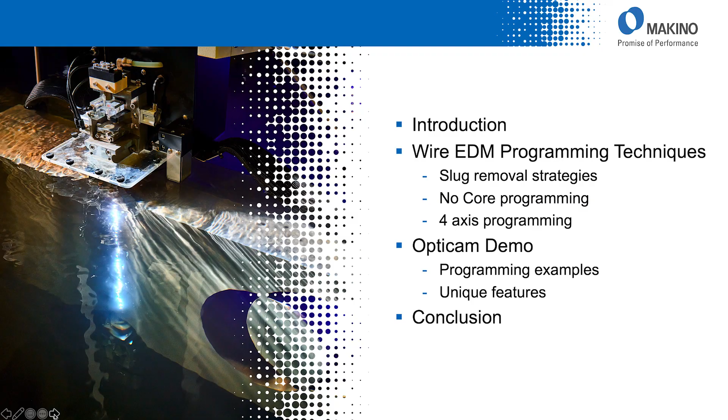Today we're in the Makino Experience Center, and we're going to be discussing wire EDM programming techniques. So first I'd like to give you a little overview of what we're going to be talking about. We're going to talk about some slug removal strategies. These are ways that you can optimize your programming. We're going to talk about no-core programming, which is pocketing, and then four-axis programming.

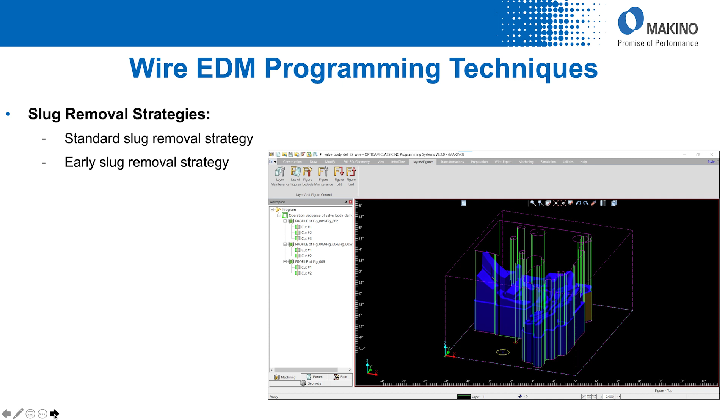Once we talk about these in the presentation, we're going to go to Alan Weeks from Opti Solutions, and he's going to give us a demonstration of the OptiCam software. So let's get started. So first, slug removal strategies. Standard slug removal strategy, we're going to discuss that, explain what that means. Then we're going to go through early slug removal and a slug removal after all of the rough cuts. So what do those mean?

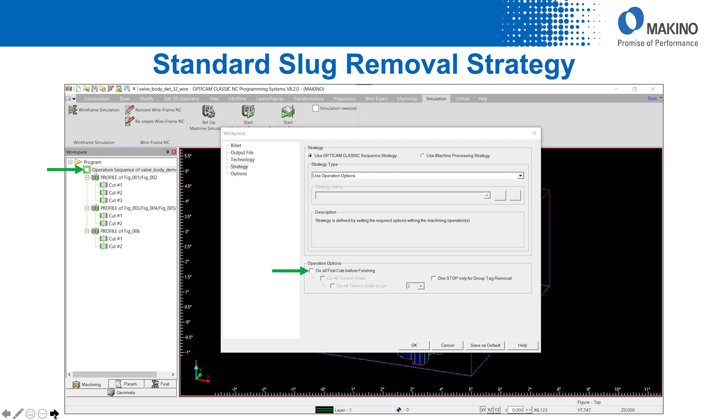So a standard slug removal strategy. In OptiCam, how am I going to make this work? Well, the first thing I'm going to do, I'm going to come in here and I'm going to select my workpiece, and it'll bring up this window, and I'm going to not check do all first cuts before finishing. This is a strategy page of the workpiece itself.

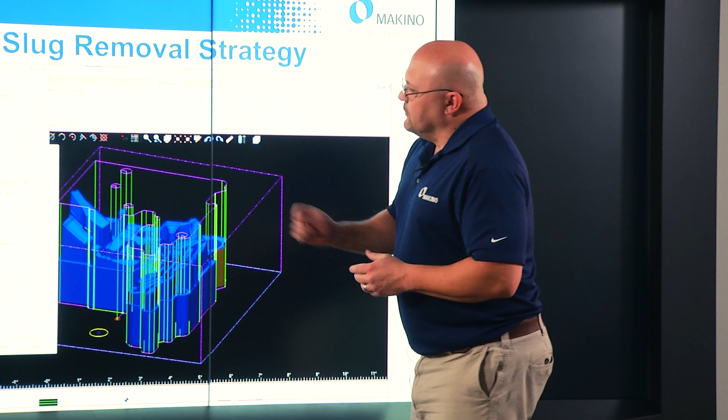Next, I'm going to go to the profile. So this profile here is for the holes that are inside of this particular part that we're looking at. And when I hit the profile, I go to the setup page and the tagging page, and you can see here, tag removal method. I have many options of what I can do. For this particular demonstration, or this strategy, we're going to use stop, then wire cut tags on the first cut.

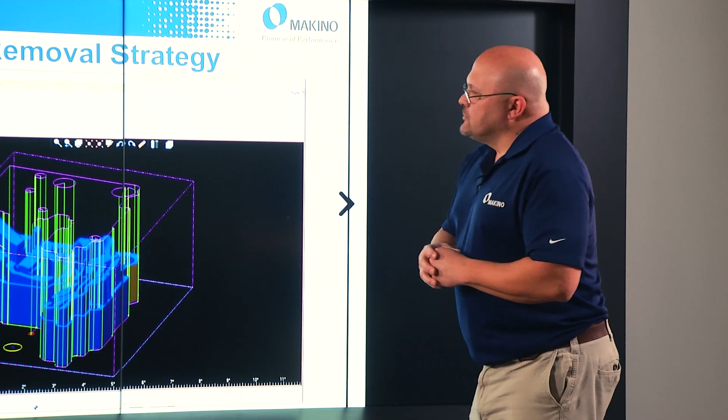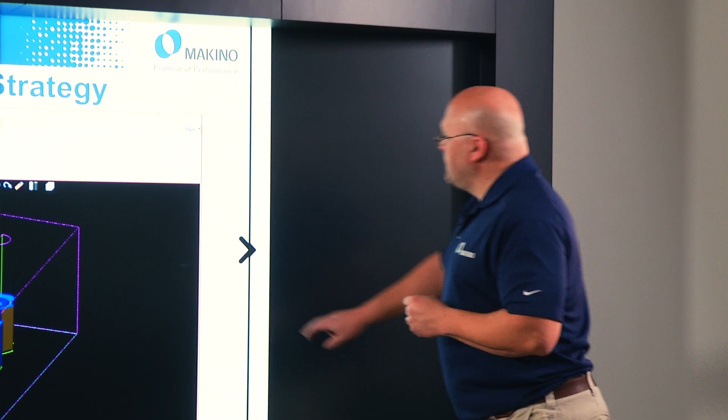Since this is a part where I have features internal and external, I need to set up a strategy for the outside of the insert. So I'm going to click on that particular profile, go to the setup page, tagging page, and I'm going to wire cut the tags at the end of the operation. So I got a little video here to show you, by setting up our program that way, how it's going to function.

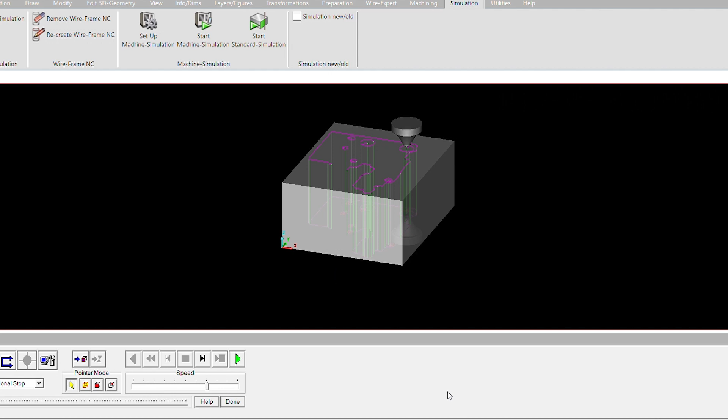So now that we've programmed it that way, it's going to show us or simulate what it's going to do. So we're going to rough the holes, it's going to come to the stop, then we will drop the slug. So every hole internal, these are core pin holes and ejector pin holes, it's going to follow the same pattern. We're going to rough it, drop the slug, and then finish cut it. So that means every time I'm dropping a slug, the operator needs to be there to remove the slug.

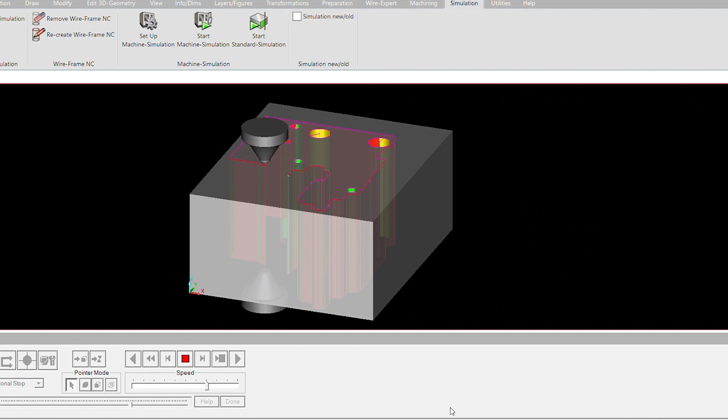So this will go through all the holes internally, because that's what we told it to do. Now once it's done with the holes, it will go to the insert itself on the outside, and it's going to go all the way around roughing it, because we told it to wire cut the tag at the end of the operation, and then it's going to go around and skim cut it with the tag still connected.

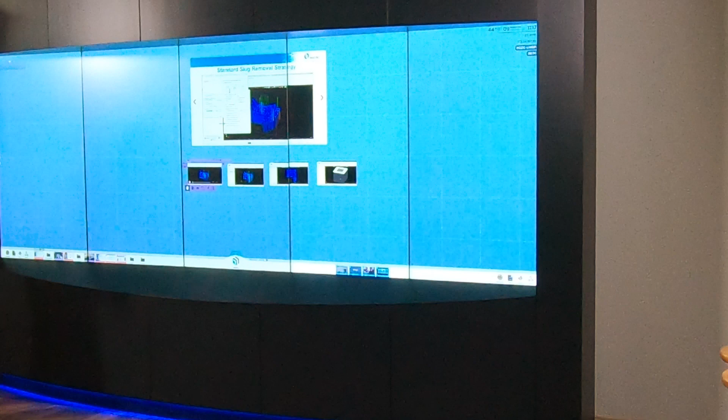And then it'll come to the stop there, and then we cut it off, remove our part, and the part is finished. So that's what I would call a standard strategy for slug removal.

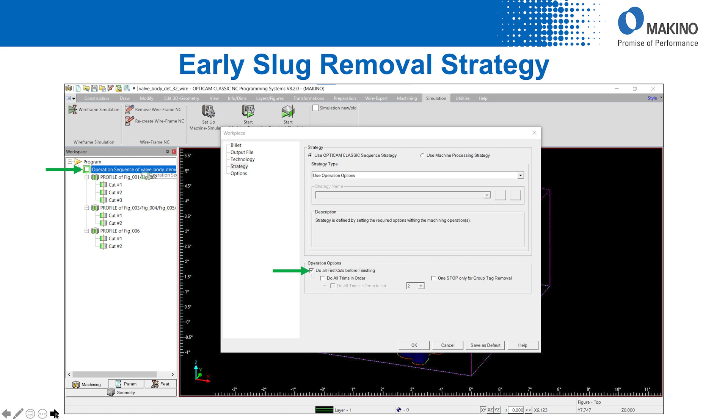So next we're going to talk about the early slug removal strategy. So again, we're going to go to our workpiece, go to the strategy page. Now, unlike the first time, where do all first cuts before finishing was unchecked, we're going to check that. We go to our workpiece profile. These are for the holes. Same thing. This is the same thing we did before. Stop and wire cut tags on first cut.

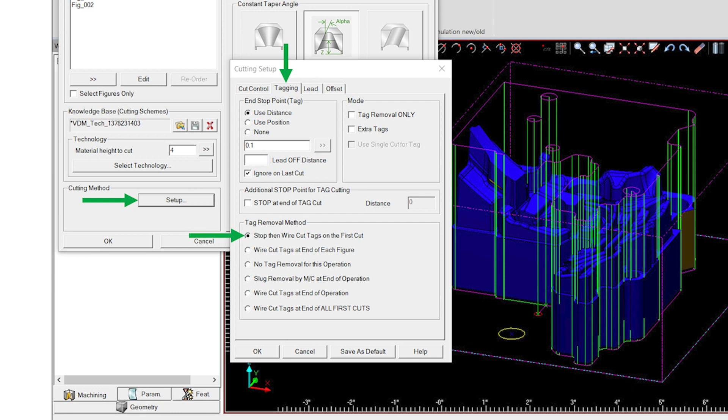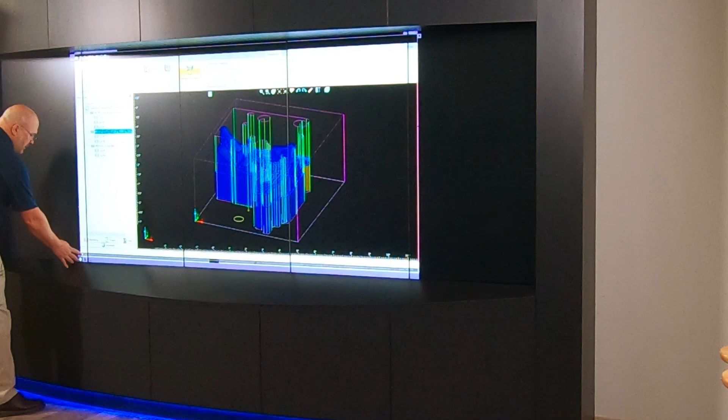The insert itself, we go to that profile, go to the setup page, tagging page, again, same thing. Wire cut tags at end of operation. So the only thing that we've changed is on our workpiece, telling it to do all first cuts. So just by checking one box, now this video is going to show how that will function.

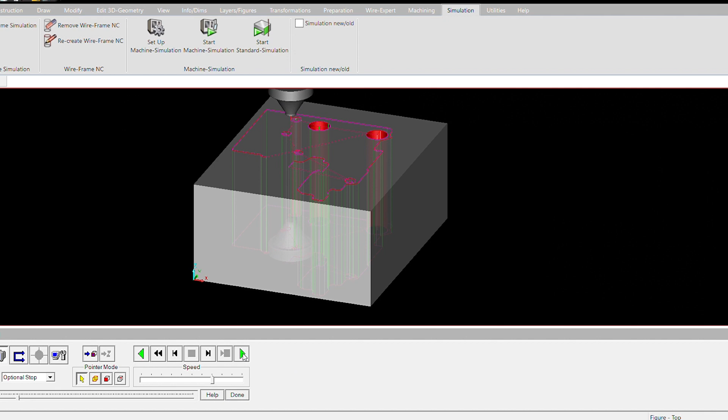Come in here, simulation starts up, and now we did the same thing that we did before, right? It went to the stop and we removed the slug. But now instead of finish cutting, we're going to rough all of the holes first. So we're going to go around, rough all these holes and drop all of the slugs.

Now you might say, well, why would I do that? Well, because the idea is to minimize the operator intervention time at the machine. So by doing this, the only time I need to be at the machine is when I'm dropping those slugs for those holes. So once I've dropped all the slugs, now it's roughing the outside of the part. All of this is unmanned machine time.

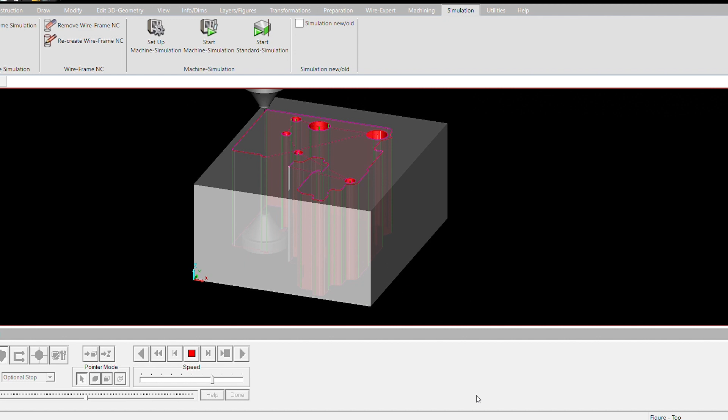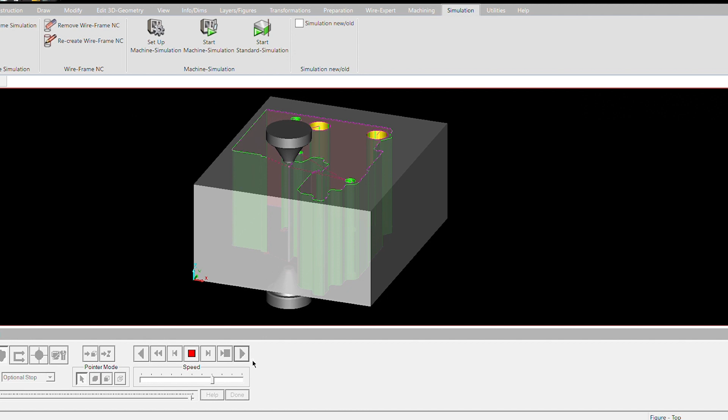Rough the outside, now it goes back to the holes. It's going to finish it. All of this is going to be automatic without the operator being there. And then it's going to go and finish the outside of the block. And then we're going to drop the part off. It's going to be the stop, operator comes back, and we cut the slug, and the part's finished.

So what we've done simply by checking one box was maximize our unmanned machine time, which is how you make money with Wire EDM. So the last slug removal technique I want to talk about is slug removal after roughing. So same thing we did on the last one. We're going to go to our workpiece, and it's going to say do all first cuts before finishing.

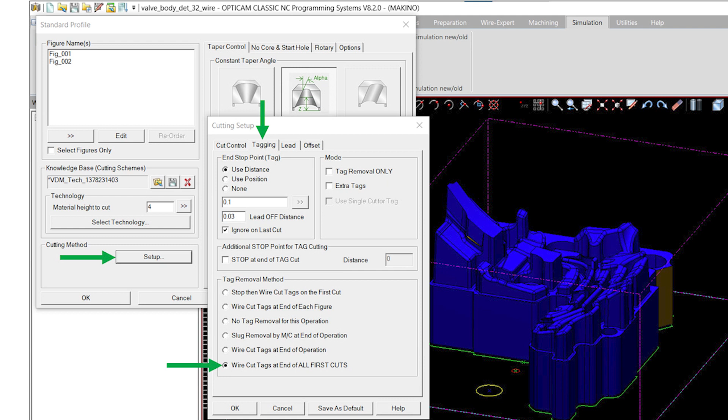Next we go to our profile. These are our holes. Set up tagging. Now this time, instead of clicking on stop then wire cut tags on the first cut, we're going to go down here to the bottom and say wire cut tags at end of all first cuts. Profile for the outside of the part is going to be the same. We're going to have to go to setup and then wire cut tags at end of operation. So again, we just changed one more thing.

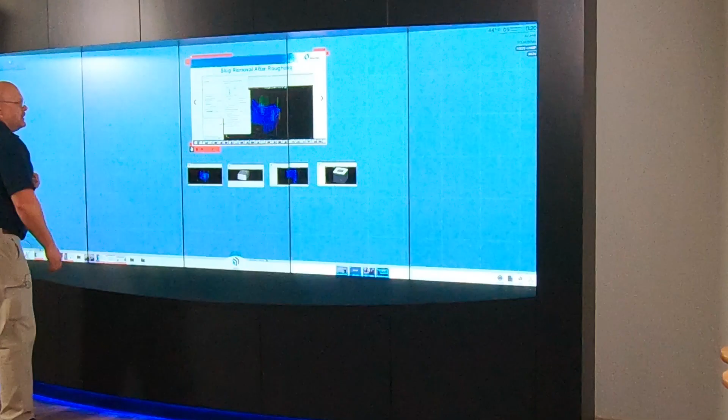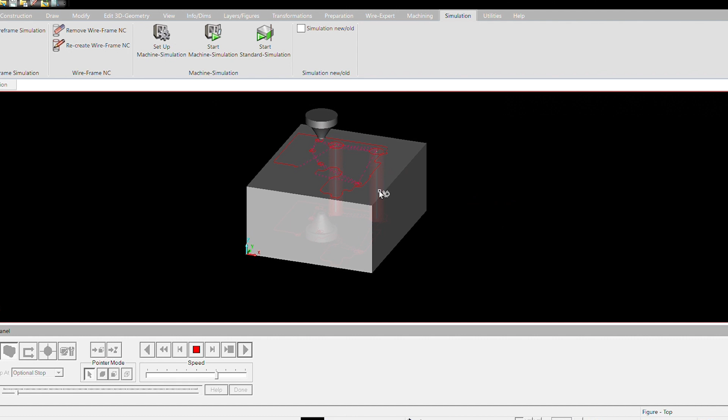And now this video will show you the simulation of that. So on the last one, you remember we went and we dropped all the slugs and then it roughed and skimmed everything. Right here, now what it's doing is it's roughing everything without dropping the slug. So that means that the slug is still intact on the inside where the holes are. So it roughed all the holes, now it's roughing the outside of the block.

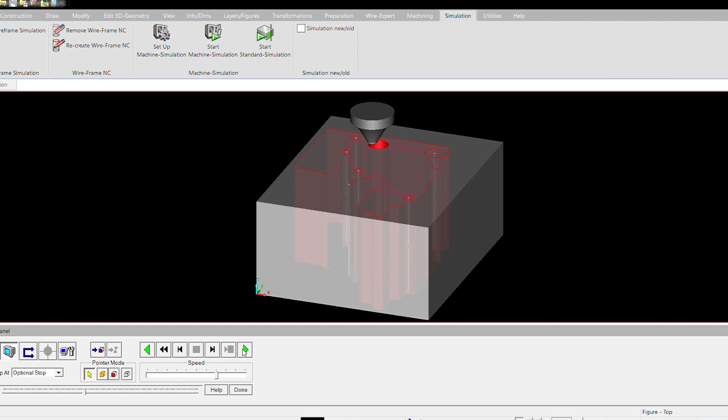Now you might say, why would I want to do that versus the way I did it before? Well, let's say I'm setting up the part right before I'm getting ready to go home for the night, and I want to get as much machining done while I'm not there as possible. By doing it this way, I get all the roughing done. Come back in the morning, I drop all the slugs. So I don't have to stay there to drop the slugs, right? I can leave immediately. So now when I come back in the morning, I hit start, drops all the slugs.

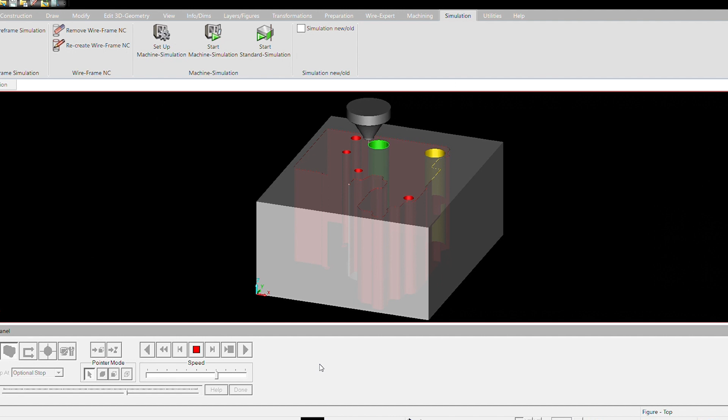And now once I drop all the slugs, again, I'm done. I can walk away, I can go do something else. It's going to skim cut all of the holes and skim cut the outside of the block as well. And then once it's done with the skim cut, again, we're going to cut that tag. There it is, part's done.

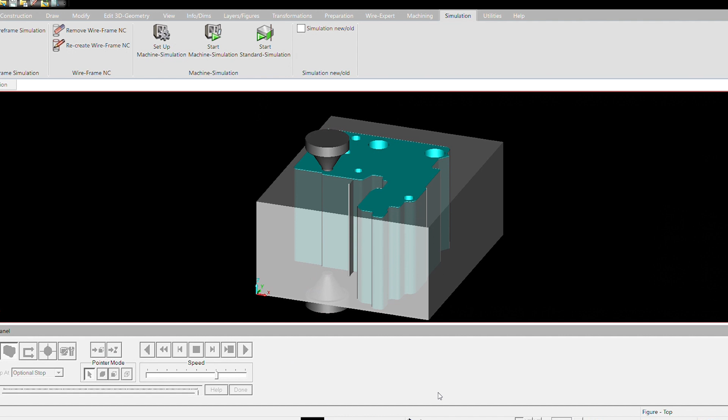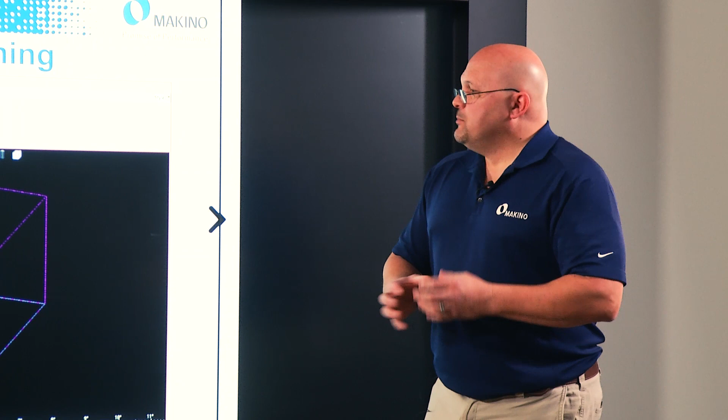So, very easy to change our process, right? That's one nice thing about this software. We can click one button, hit post again, and totally change the way that we're going to process this job. So that's just a few of the options that we have. There's many other ways that you can do it, many other tag removal concepts, but those are kind of the three major ones that I wanted to touch on today.

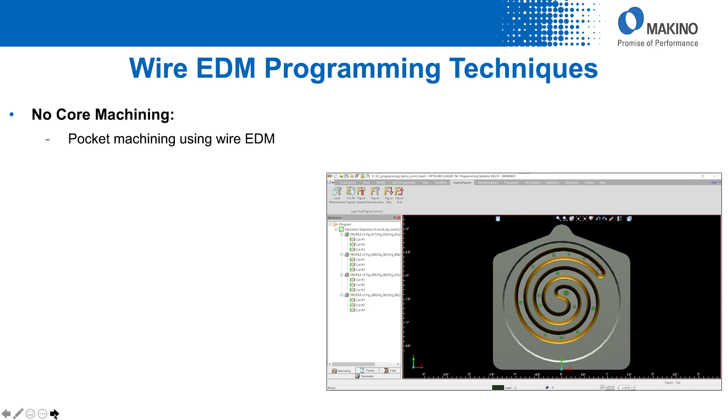So next, I'm going to talk about no-core machining. So no-core machining, what does that mean? Well, essentially it's pocket machining using the Wire EDM. If you're familiar with doing pocket machining on a mill, same concept, but we're using the Wire EDM instead of an end mill. And what does this do for us? Well, it eliminates the need for slug management. So why would I want to do that? So if you think back to what I just showed you, we're dropping those slugs. We have to think about how we're going to process a job, when we want to drop the slugs, when we want the operator to be there.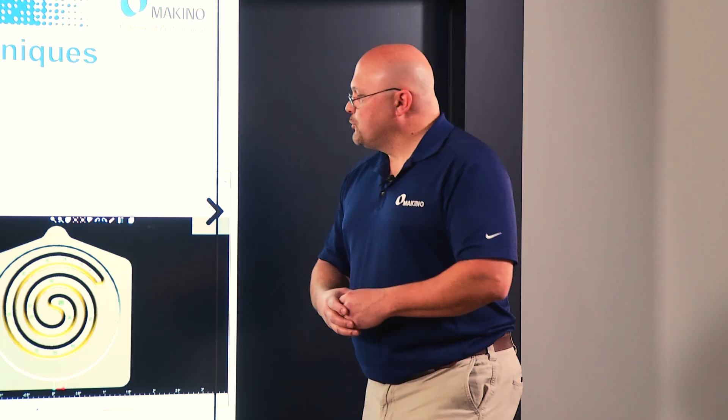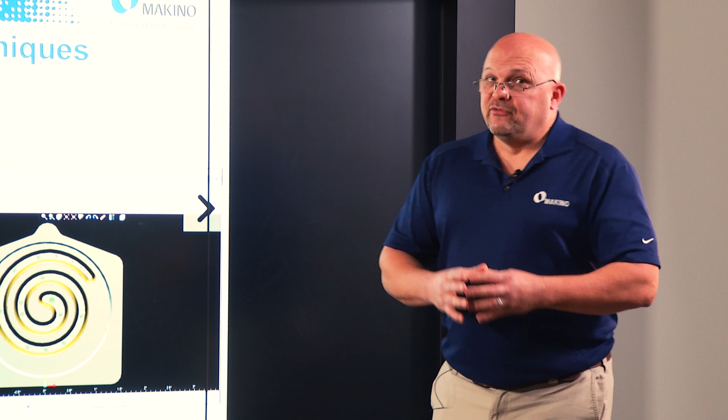That eliminates that. This is primarily used for small features because Wire EDM is a slow process. You don't want to have a really big opening and no core it because it's going to take forever. But for small features, it's very, very effective,

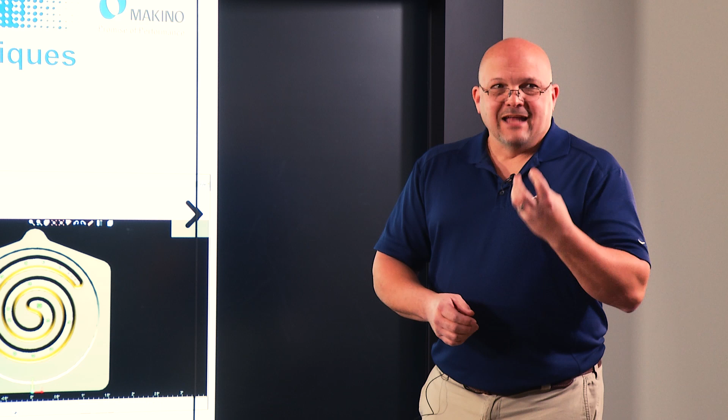because if I have a small feature and I'm going to cut it like we did the first examples, I'm going to get a little sliver. And it's not going to be a big slug, and that can cause all kinds of problems in the machine. So using a no-core technique is very good in those particular instances. To keep in mind when you do no-core, the roughing NC code is created without an offset. Okay, so what does that mean? Well, I'm going to show you.

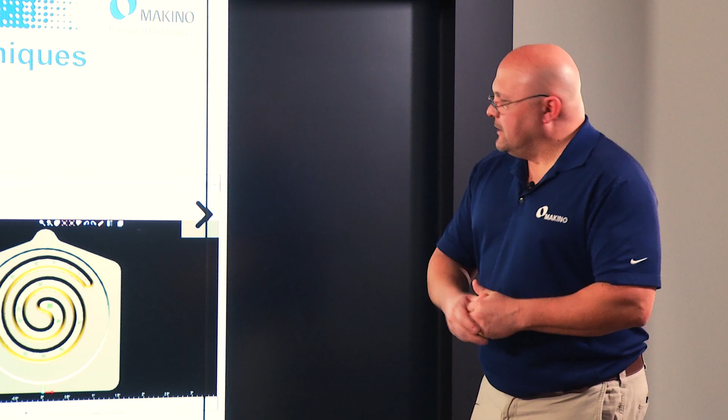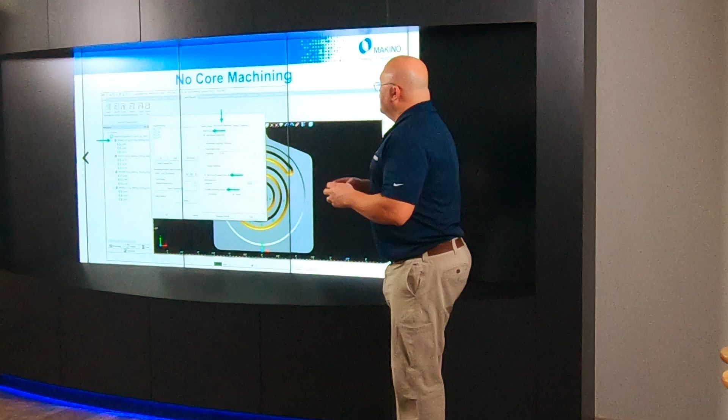So to do a no-core, we're going to go to the workpiece, and once we open the workpiece, there is a tab that says no core and start hole. So we go to start hole, and we can tell it what kind of start hole we have. Is it a round hole? Is it an irregular shaped hole? You could even create another figure inside of whatever shape you're cutting, and it could be an irregular shape. 9 times out of 10, it's going to be a round start hole. And then you would put in your diameter of how big it is.

And then you simply check the box, no core, pocket first, and then you want to give it a step over distance. So that means how much of a step over am I going to have when I'm doing the no core. For Makinos and the technology we have, 8 thou, if I'm using 10 thou wire, seems to work the best, so that's why I use the 8 thou.

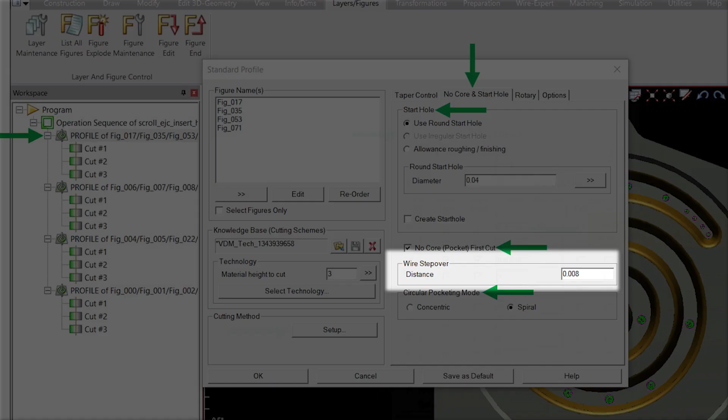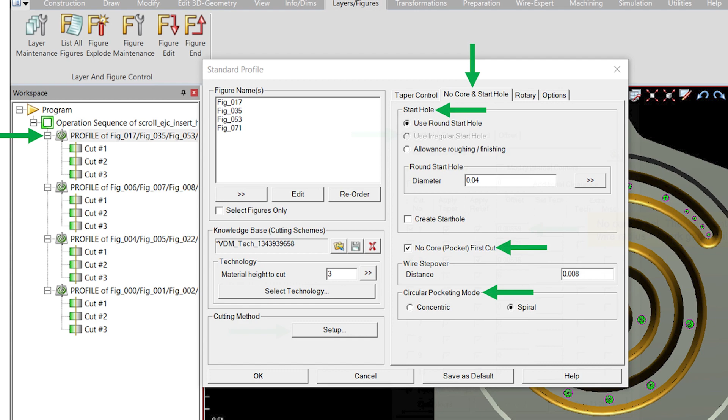And then I also have options on the pocketing mode itself. So I can either do a concentric, where it's just stepping over that 8 thou amount and cutting a circle, right? Step over, cut a circle, step over and cut a circle. For this particular job, I use spiral. So once I do that, then I go to my cut control page. I go to setup page, cut control.

And right here in the roughing offset, this is where we load our cutting offsets and cutting power settings, which you'll get a demo of from Alan a little bit later. But for no core, you'll get this message if you hover your mouse over that first offset. It's going to say no core is set. Value entered in this edit should be the wire radius, spark gap, and finishing allowance per side.

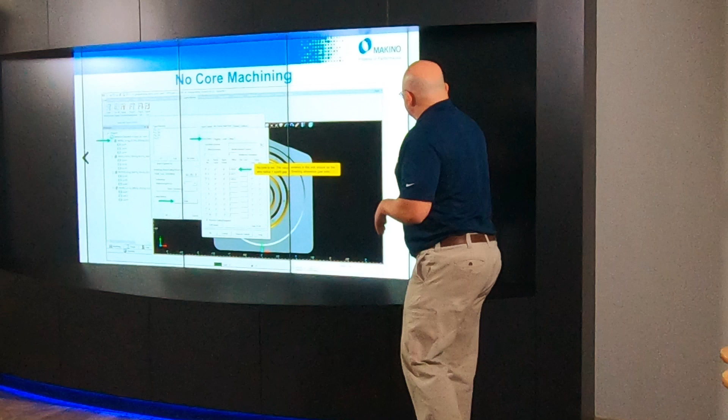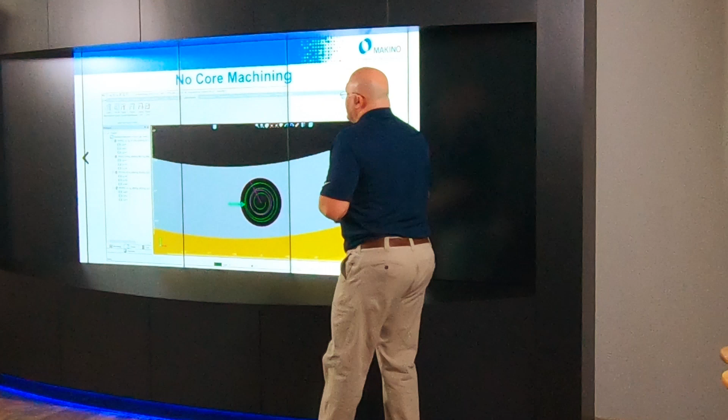The reason for that is that it's not going to apply an offset. So when you do your no core, the geometry is created for the rough cut, and the wire is going to move on the center of that geometry. And this slide kind of shows you that. So once I've done the program, it'll generate this code right here. You can see the green shape, and that wire will run right on the center line of that shape, and that's why you have to compensate for that.

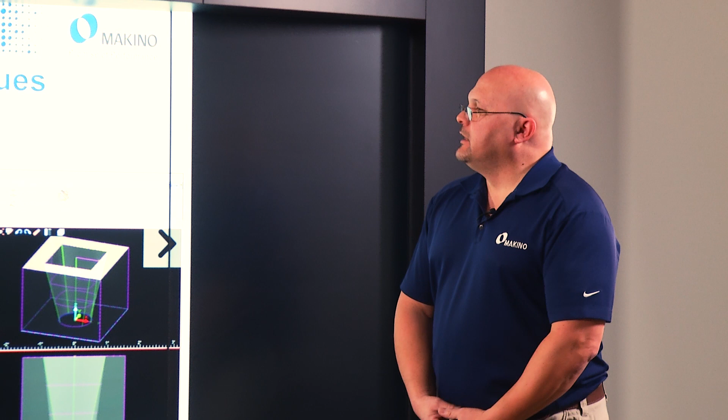So the last technique I want to talk about right now is 4-axis programming. We get a lot of questions about 4-axis programming, how it works, how you should do it. Well, it's a type of taper machining. You know, you can just apply a taper if you want a T value, and it'll cut that angle. But this is a way to do it with 4-axis. And this is a really common way to do tapering, because so many people use solid models today. You can just extract these angles from the solid model.

So when you do 4-axis, you have to create both an upper and lower profile. So everything we've done previously is just a 2D profile. In this instance, we're going to create both an upper and lower shape. With the Wire EDM, you need to think about what it is. So it is a true 4-axis machine.

And what does that mean? That means that I have an XY on the bottom and I have a UV on the top. And they're totally independent of one another. So the way to look at it is I've got two 2-axis machines built on top of one another. Because of that, I can program completely different shapes on the bottom and the top.

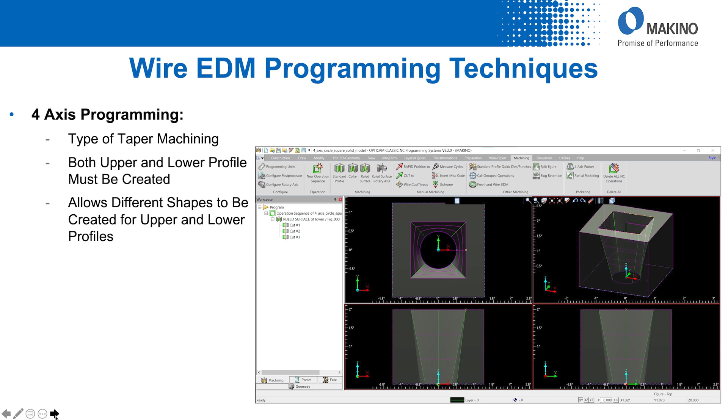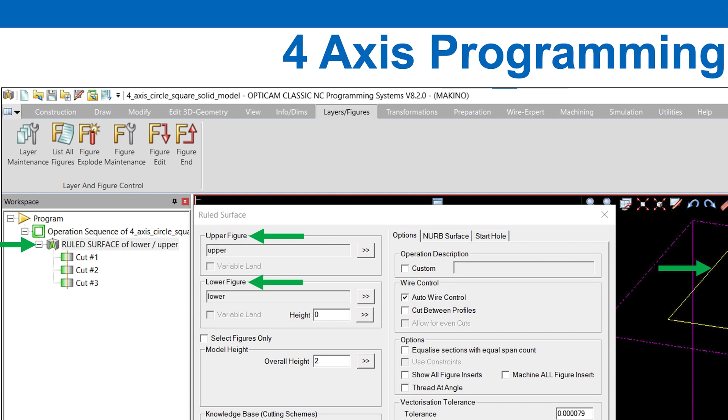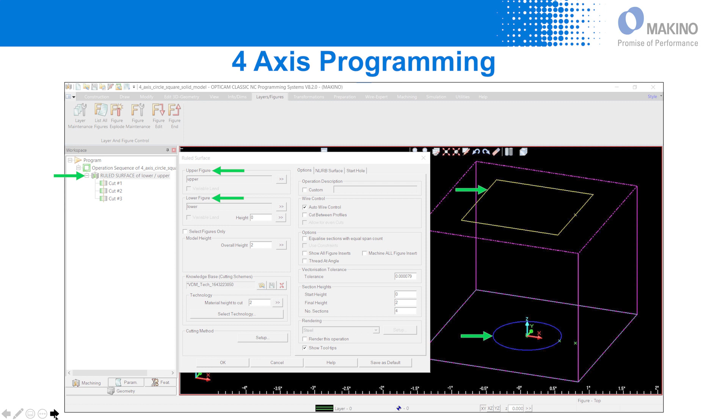So this is a very simple shape here, little circle square. So I'd come into program, I hit ruled surface instead of standard profile. And then when I click on the workspace, I have to create an upper and a lower figure. So obviously I'd create my geometry prior to this, and then I select it. So if you look here on the graphics, the blue is my bottom geometry or lower geometry, and the yellow is my upper geometry.

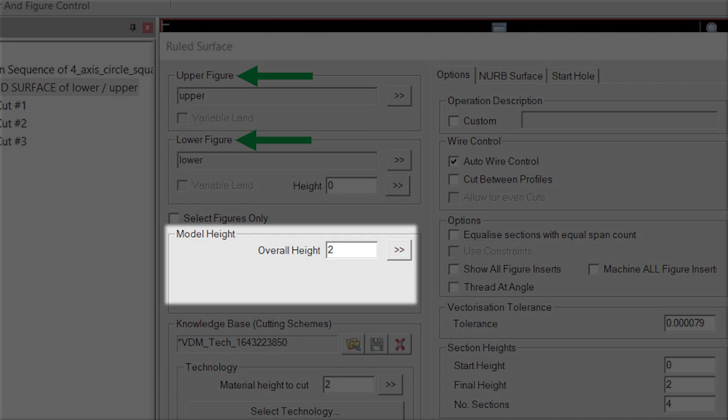I have a couple things that I have to tell it. Where is the lower geometry? So you can see in that window there, it says, what is the height? In this case, it's right at 0, which would be table level. The overall height is the distance between the two shapes. For this example, it's 2 inches.

Now, I could move that part off of the table. If I'm on a fixture or something, if it's up 1 inch, well then my lower height would be 1 inch. It would not be 0, right? Because the table is always 0. And this software will compensate for that when it does its post-process.

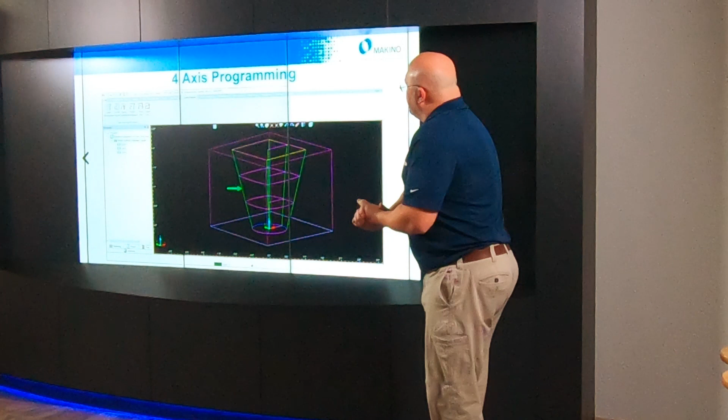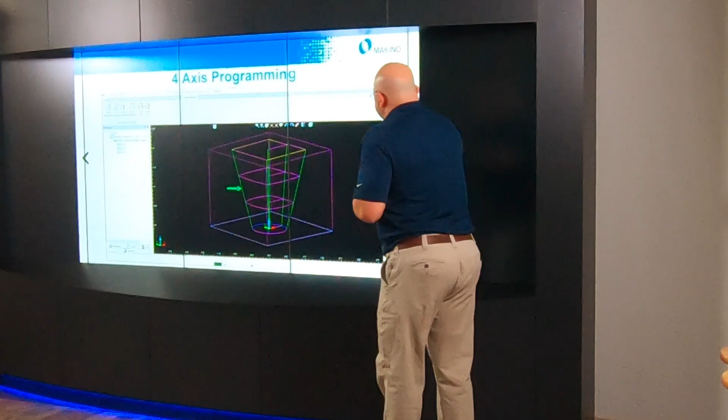Once I do the program, this is the wireframe of the actual program that it creates. So you can see it's going to apply my angle, and you can see how the shape changes from a circle to a square gradually as you move up that angle, okay? So I do have an example of this one for a simulation. So let's take a look at that, just to give you an idea of what that looks like.

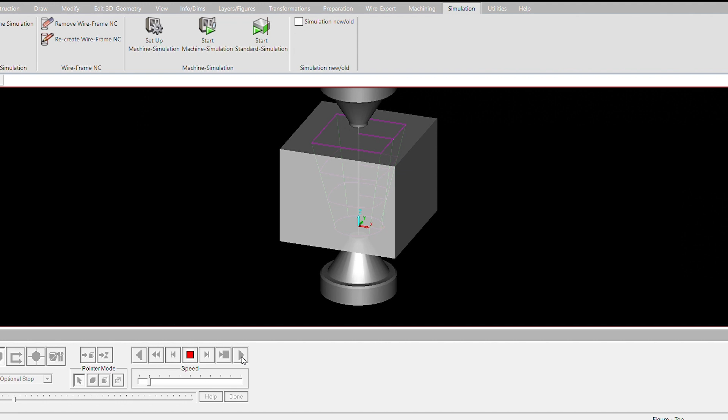So now we're going to come here and do the simulation. So you can see how the upper and lower head are going to move totally independent of one another. So I'm cutting a square on the top and I'm cutting a circle on the bottom. Come to my stop and it cuts the slug.

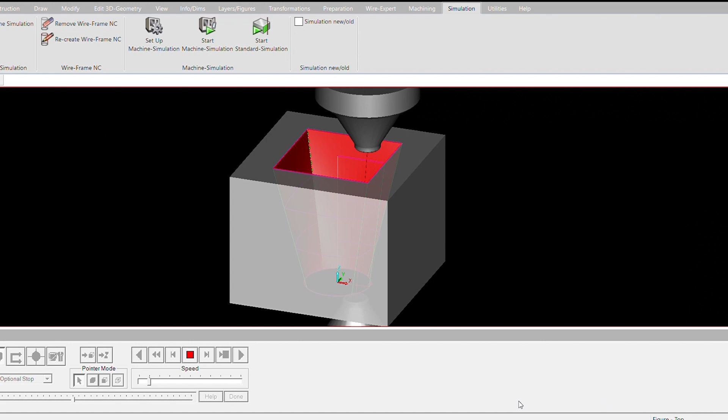Nice feature of this software, I can actually test this slug release. And so by clicking a button, it lets me know that that slug will come out of my parent part. The reason for that is because it is 4-axis, totally independent programming. I could write a program where I could lock that slug inside of my part and not be able to pull it out, just based on whatever shape I was cutting. So it is a very nice feature of OptiCam. And that's that simulation.

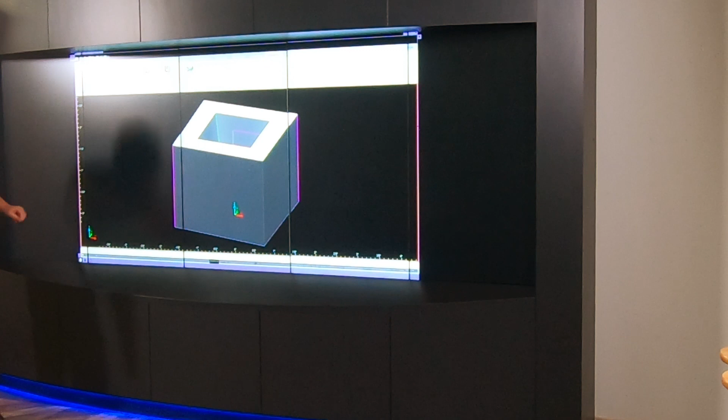Okay, so that's it for the presentation. I just want to give you a quick overview of what the software has to offer, how easy it is to change your processing, change your concepts of how you want to do things.

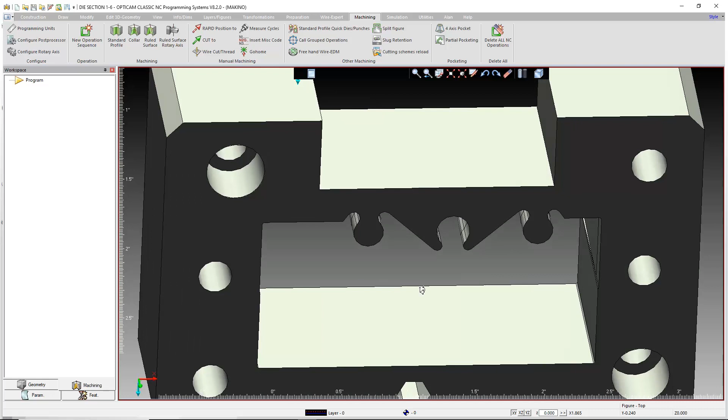So if I fit that back to the screen now, what I'm going to do to remedy that is I'm just going to right mouse click on this bottom face and select the face option, and select this option, rotate to plane, just to get it in the correct orientation, which in this case we want that face to be in the XY plane. We want to datum that plane and rotate all the solid items. Now if we look at this and we go to our XY view, you can now see it is in the correct orientation. So once we've done that, we can go ahead and start our programming process.

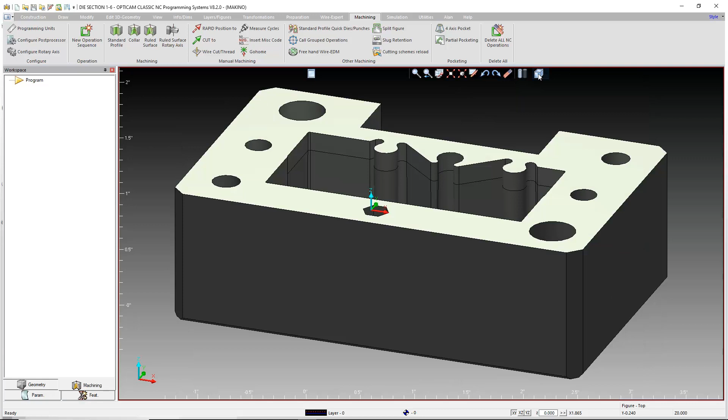So to first of all get what features that we want to machine in this block or create a program for, I go to our Wire Expert menu, and I just want to select this option called Automatic Feature Recognition. So in this first process, I'm just going to create features for all the internal die features only. This is just a clearance cutout, so I'm going to come back and do this as a manual feature. But to get all my internal features, I'm just going to select internal die features only, select OK, and then it will highlight all the features that it found.

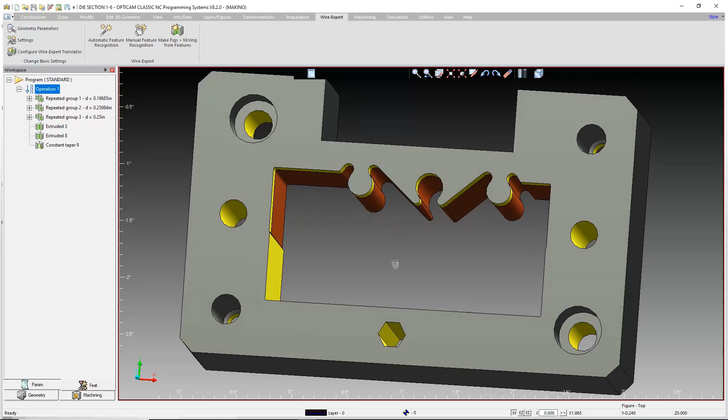Okay, so if I look at this first group, you can see that it's found this hole. It's put it in a magenta type color that you can see, and then anything that's been grouped with it will be in yellow. So these have actually been grouped together. Now if I look at what else it found, it found these bolt holes. I really don't want to include those, so I'm just going to right mouse click on those and say delete group, because those are already going to be pre-drilled. And then also these lifter holes, I don't want to do anything with them. They've been pre-drilled as well, so I'm just going to delete that group.

Then we have the heel and the land for the die opening has been found. That's good. Then this hexagon has been found. We want to wire that as well. And then the taper has also been found. Now, one of the things I wanted to point out on this is that you see we have arc to arc conditions here. This can sometimes cause undercuts when you have arc to arc conditions. So I know that's probably going to cause an undercut or an issue with the toolpath or the NC code, so I'm going to force this in just a moment to output this as a 4-axis code instead of just a simple taper, a varying taper. Okay, so all that looks good.

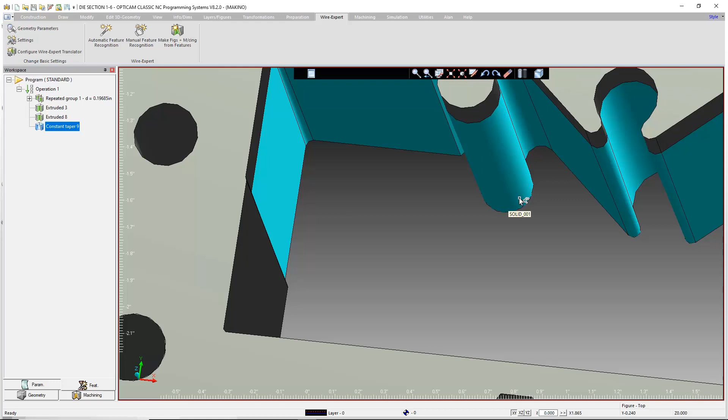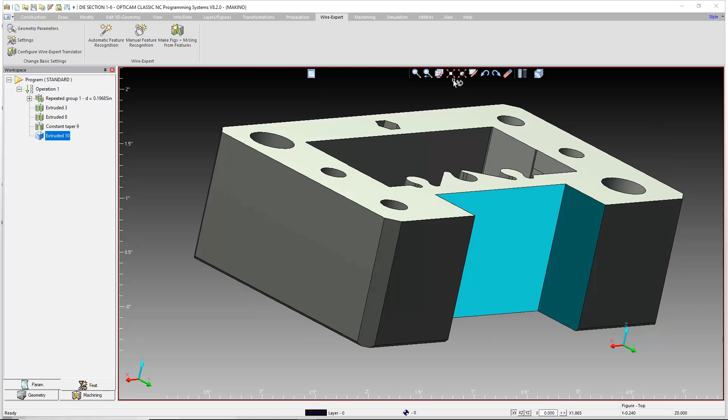So I'm ready to go ahead now and create a manual feature for this clearance cutout. So I just go back to the top of the Wire Expert menu, select manual feature. I'm going to do manual face selection, and I'm just going to pick these 3 faces. And then I'm going to end the selection, finish feature, and then end the command. So now it has a feature created as well. Okay, so all my features have been created.

Everything looks good there. So I'm going to go back to my XY view, and I'm going to create all my machinings. And it's also going to create figures or project everything at the correct heights based upon the solid model. So I'm going to select this option called Make Figures and Machining from the features. Not going to apply any technology. I'm going to do that later. I'm going to go ahead and create a billet or workpiece from the solid body.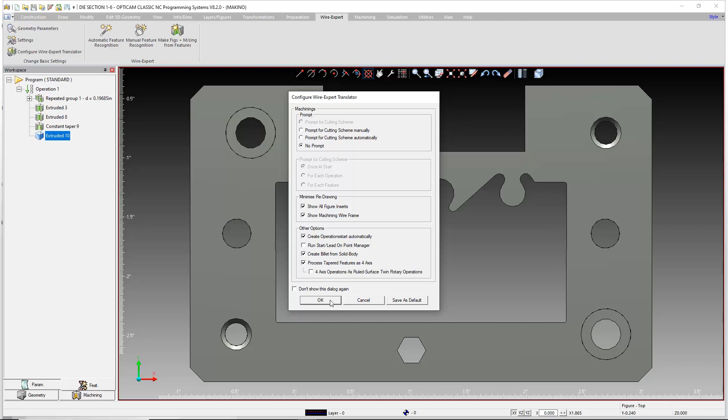And this is the option I was talking about. I'm going to process all the tapered features as 4-axis. I'm going to select OK, and then it should go ahead and apply toolpath to all those openings. So we'll give it just a minute to do that. And that's exactly what it looks like it has done. So let's go ahead and finish the programming side of this.

So I'm just going to start at the top of my machining list. So I'll go to my machining tab at the bottom. These are all the machinings that have been created from those features from automatic feature recognition. So I'm going to go to my operations sequence. I'm going to give it a part number, part description. I'm just going to call it a die block. All of this is optional. You don't have to do this.

So you can put this in or not. Okay, it created a billet that you see here from the solid body. I'm going to give it an NC file name. Just call it anything there. This is where I'm going to post the file to this directory. I can post it directly to the machine if it's networked or whatever user specified directory that I want.

Where am I going to start my program? In this case, I'm just going to pick from the corner of this block. And then the reference position, I'm going to pick up the same location there. And I can pick my datums, G92, G54, G500, G54. In this case, I'm just going to use a G92.

If I go to my technology, this is the material I'm going to be cutting, steel. What wire type am I going to be using? Just brass 10 thousandths wire. Also, being that there's a lot of material being removed here, I am going to tell it to do all first cuts, all my rough cuts, before I do any trim cuts.

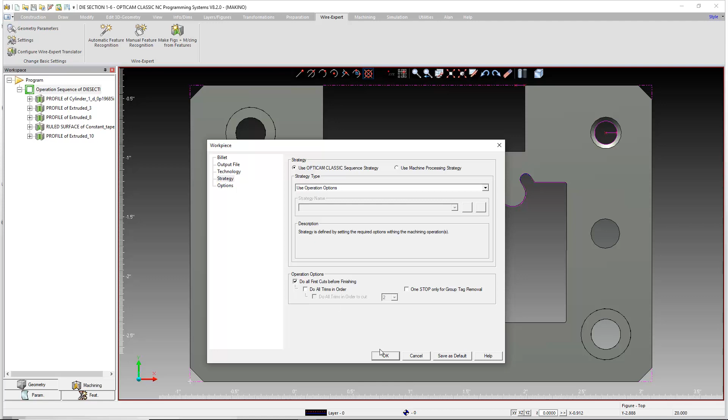Okay, now that that's been done, I am going to come in here to my cylinders or my dowel holes. I'm going to go ahead and just pick these in the order that I want to machine them in this particular case because of where I'm starting at this corner. So I want this to be my first shape that I'm going to cut. So I'm going to do that.

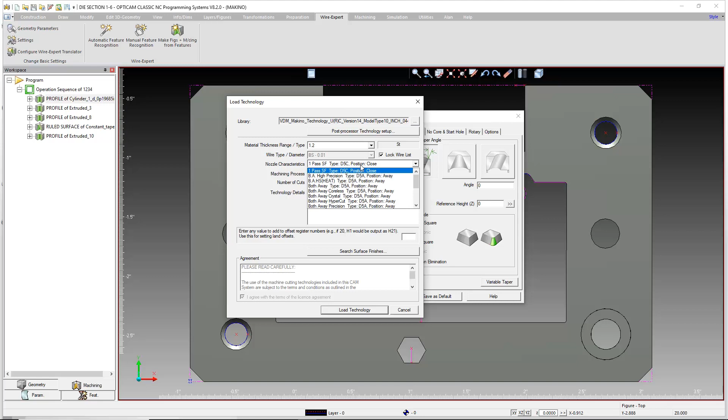Now I'm going to select my technology based on 1.25 inch thick. So it brings up my select technology. In this particular case, I'm using the Makino U series. So I'm just going to do a 2-pass technology on pretty much everything. So 2 cuts there. This is the power settings, the offsets. So I load my technology, go to setup, 2 cuts.

I'm going to put in a little bit of a clearance here. So I'm going to go minus 0.0001 or a tenth per side, just to make sure that's a tap fit for those dowel holes. The tagging is the glue stop or the tab. We refer to it as tagging. So I'm going to put a 50 thousandths glue stop or tab there, and I'm just going to let it lead back to the center of the hole. And I'm going to stop and wire cut tags on the first cut.

I'm going to lead on with the line, off with the line, and then we're going to cut counterclockwise with the wire offset to the left. And it's doing this because I'm using auto direction, which is mostly what you'll use most of the time. So I'll select OK to that and OK to this. This is where I could put comments in the code if I wanted to. In this case, I don't. So I'll just select OK to that.

Now I'll do the heel and the land area for this opening. So I'll just go into here. Again, I'll just select my technology. We'll just do 2 cuts. So I'll select my nozzles as precision both away. Loaded up 2 cuts. We'll load technology. We'll go into setup. Pretty much do the same thing we did before. No clearance. We'll put in a tag distance again of about 50 thousandths.

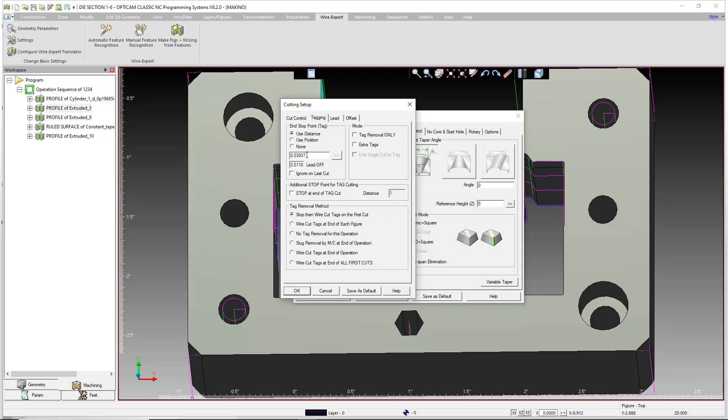We will lead off about 30 thousandths. Drop the slug on the first cut. Lead on and off with the line. And then, of course, we're still using auto direction. So we'll say OK to that and OK to that. No comments in the code. So now we've applied technology for that.

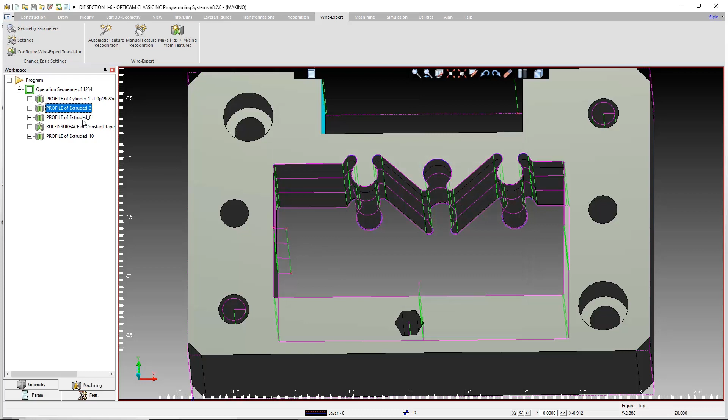Now this hexagon here, we want to do something special to it. So I'm going to go into the standard profile operation for that, or the machining operation. We'll load 2 cuts again for this particular one. I'll use the same nozzle characteristics. We'll load 2 cut technology.

Now in this particular case, instead of dropping a slug, I'm going to do a no core or pocketing operation, and I'm going to put in something like 0.125 as my start hole. But just to make sure that my hole location is good and the hole's not angled, I'm going to drop that down from the actual hole size, just so it starts no coring early and we don't have to worry about any short circuit or anything like that.

So I'm going to no core pocket the first cut, standard pocketing, and I'm going to put an offset step-in distance of 6.5 thousandths, just a little bit more than half the diameter of the wire. Then my trim cut will be my second pass, and then all these other items will apply.

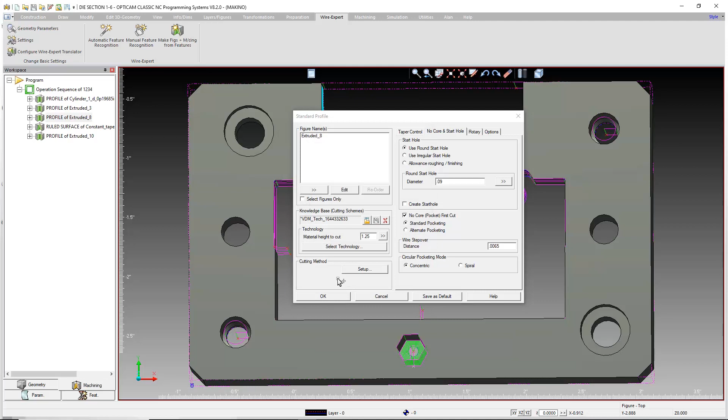Lead off, I'll just let it lead back to the start hole location, and then you'll see the tagging is grayed out because we're not dropping a slug, and all these options we can just say OK to, no comments to the code. And we'll just take a quick look at what the no core tool path looks like. So not dropping the slug, but just slowly eating that material away. So we did our no core.

Then our ruled surface operation, remember we had that option set to output the taper as a ruled surface. So it's taking all this information from the model. Really, this is just clearance, a clearance angle. So in this case, I'm going to just do a rough cut only. If I go into setup, you can see it has a rough pass offset only.

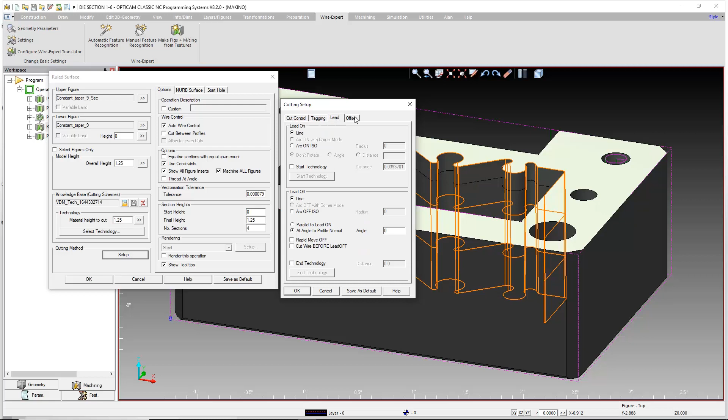Tag distance, we'll put in something, again, about like 50 thousandths. Well, in this case, really, we don't need a slug. Not going to have a slug to drop because it's such a slight angle. So I'll just say no tag removal for that, and then we'll just let it lead off back to the start hole location. All this is preset for us, so we'll just say OK to that, and then OK to that. No comment in the code.

And then lastly, what we'll do is we'll load just a one-pass technology for this. Okay, so I'll just go to my select technology, use the same nozzle characteristic, and then we'll just select a rough cut only, load technology, and we'll go into tagging. We'll give it something like a 50 thousandths tag, and we'll just let it lead off. Let's see, about 50 thousandths as well. Drop the slug on the first cut. All of this has been preset.

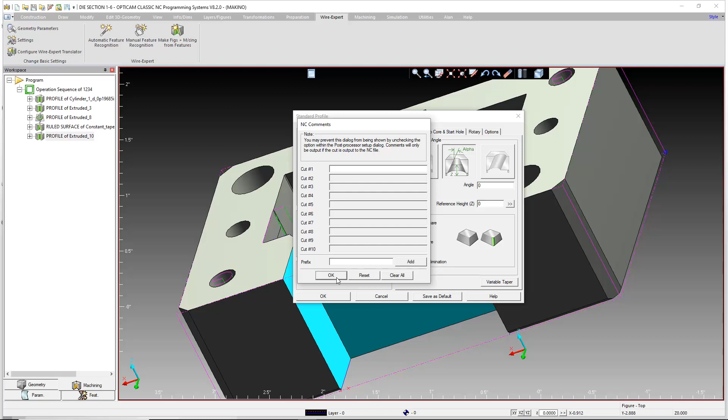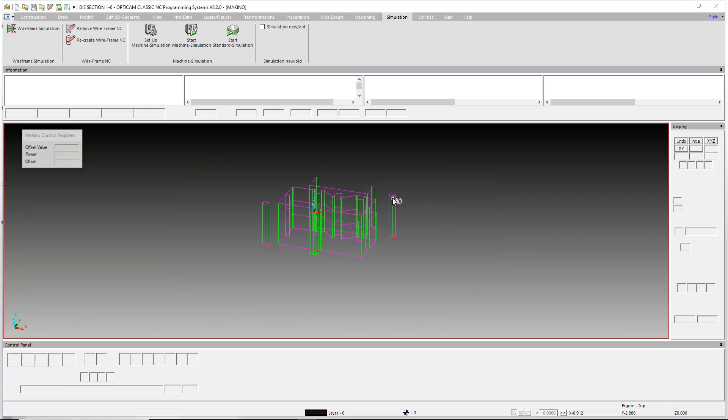Select OK to that. Okay, so once we've applied all the machining, done everything that we wanted to do, associated the technology, then we can run our simulation. So if I go to simulation, I'll start standard simulation. Okay, so we'll just center this, fit it to the screen. I have my speed control. It'll stop at my optional stops. So we'll just go ahead and select that.

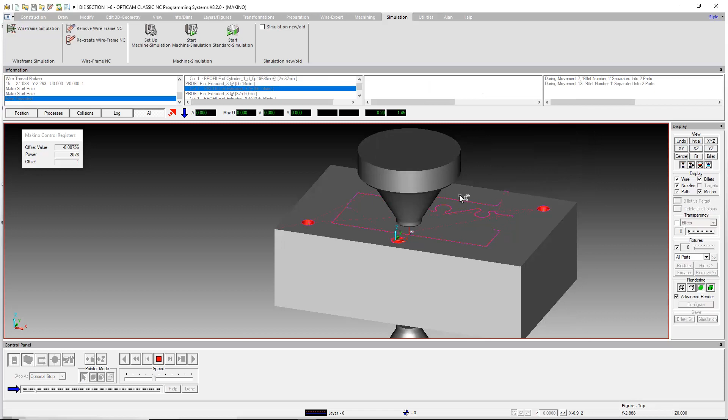We'll zoom up. You can see it stopped at the glue stop or the tag. It's going to drop the slug. And remember, we're roughing everything out first, so it's doing all our rough cuts first, removing the slug, and it's going to come and cut our rough cut of the heel, straight heel area, and also the land area. We'll just speed this up just a little bit.

Just going to drop the slug, and it'll do the no core. We'll definitely speed it up for that. So it's just slowly eating that material out instead of dropping a slug. Then, when it finishes doing the no core, it should go and cut our taper cut, the clearance for the land. And then lastly, it'll come and drop the slug for the clearance. Then it comes back and does all the trim cuts for the land.

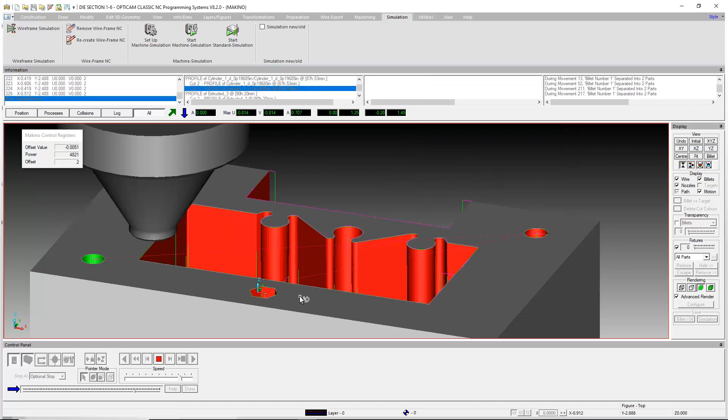And I can reorder any of these that I want in the list. So the simulation looks good. That seems to be done. We can go back to our top view or XY view. If all the simulation looks good, we can zoom in and see graphically as well the number of cuts that it did. Then we just post-process our code, and then quickly and easily we were able to generate a program with different operations being done to it and have code ready to load into the Makino wire machine.

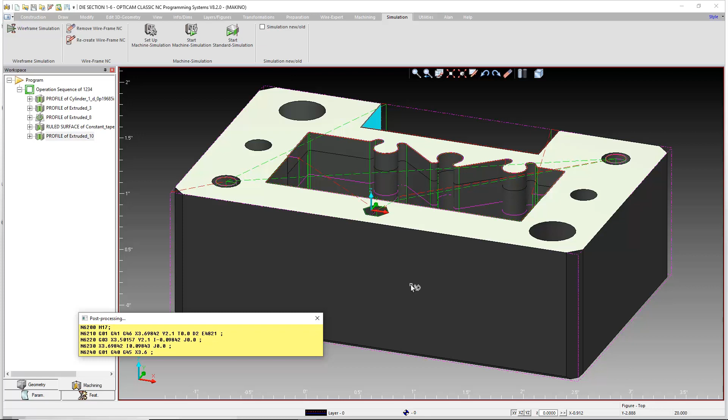So that's the steps of what you would do for using the feature recognition or the Wire Expert within the OptiCam Classic. So I hope everybody found this information useful.